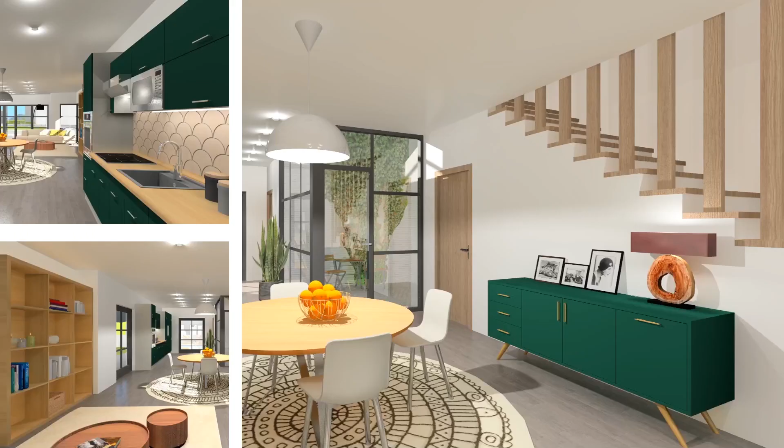Nice meeting you all, this is Zoltan Toth here. Together with Illes, we did quite a number of webinars in the past, and the topics we are always trying to focus on is to show what ARCHLINE is capable of.

There are two products that we are showcasing today. One is ARCHLINE.XP, which is a design software, and the other one is ARCHLINE.XP Live, which is the fully immersive architectural visualization software that you see on the screen.

Barbara mentioned in the beginning that there is no CAD skills required. ARCHLINE is a CAD software, but it's very forgiving for newcomers. So if there's one advantage I could mention right off the bat, it's that it has a very forgiving learning curve.

I think when it comes to interior design, the first thing that we have to start with is just imagine that you sit down with your clients and you start throwing around ideas, and the first thing you have to compile is a mood board. Now, what is actually a mood board? It would be a collection of ideas, inspiration, textures, images, or just things you are throwing out there in order to influence the rest of your workflow.

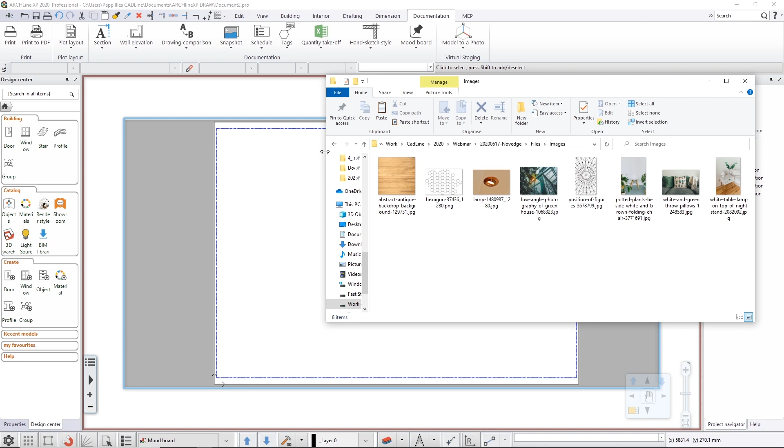So in ARCHLINE, you start with a sheet that you design, define how large of a sheet you want, and then you just start throwing in pictures. The point is that you don't need an external image manipulation software to do that, because ARCHLINE gives you the environment to build up these mood boards yourself. In addition to images, you'll be able to add even hatch patterns, colors, textures, text, or any kind of raster format.

You can use this to show your clients what the end result should be influenced by. Do you want to crop the images? Do you want to modify it? Maybe you want to recolor them. You can do that too. You can even invert the colors.

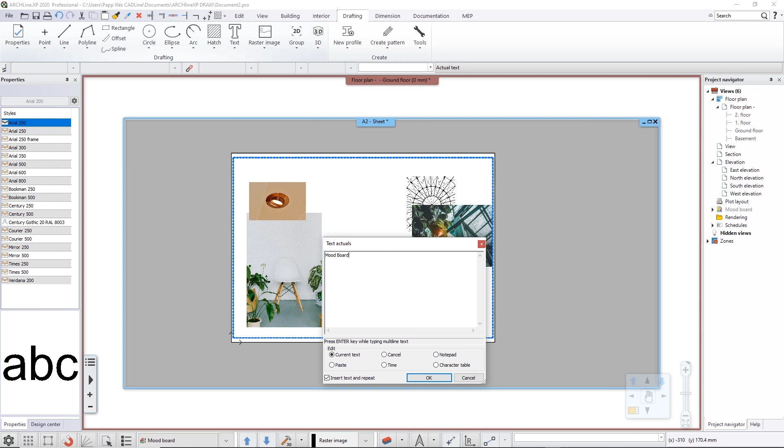The point is that this shouldn't be complicated. This shouldn't be a task which would require external software. Just use ARCHLINE.XP to get on with the first couple of steps of design. Like I said before, you can add text, even table text if you want. This will be the first part of your design, even before you get started.

Once you have a good idea about what kind of ideas you want to communicate, you get down to design. But more often than not, you are not going to draw the first lines because somebody else has already done that on your behalf. So more often than not, you would have to use external files from other sources. I'm thinking of images, PDFs, maybe CAD files.

One advantage I could mention in favor of ARCHLINE is that it is very open to other platforms and file formats. So it might happen that you get floor plans in a PDF file, raster image, maybe an AutoCAD file, or if you are working together with an architect, you get a file from Revit in an IFC or even SKP format. The point is that whichever file format you might be finding out there, you should be able to import and process them. We have a few examples here without showing you everything, because time is not enough for that.

Let's go with the first example, importing an image. Let's assume that the best you have is a scanned floor plan, a raster image, which is not the highest quality, but if that's the best you have, then that's the thing you have to work with. So the only thing you have to do is grab the file, drag it, and drop it onto the software. Do we even know how large this floor plan should be? We don't, so we just place it.

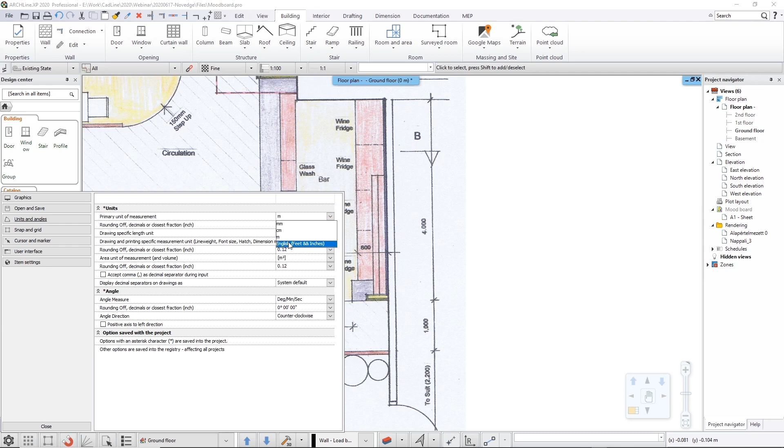If you find any numbers, now we know that this plan came from Europe and it has millimeters. But how it should be recalculated, that's anybody's guess. First, let's check the units that we have. We know the software is now in meters, in metric, but we are just going to quickly switch it to imperial and define the rounding, the decimals, etc. Once we have done that, we can rescale this image to fit our purposes.

Now we know that, for example, 4,000 millimeters should be 13 feet and 1 inch. So we are just going to recalculate that. Just type in the values, punch in the values, hit OK, and the software rescales the whole thing. The result is a fully scaled up floor plan you can start working with. You could be using it as an underlay for your further sketching. So this is not a CAD file, this is a raster image, as good as it gets, but this is a good start.

Now let's talk about PDFs, another very widespread format. When it comes to PDFs, you could be facing a similar raster-based PDF like this one, or you could be luckier than that and have a vectorized PDF, which happens more often than not. So let's punch this in and see what happens.

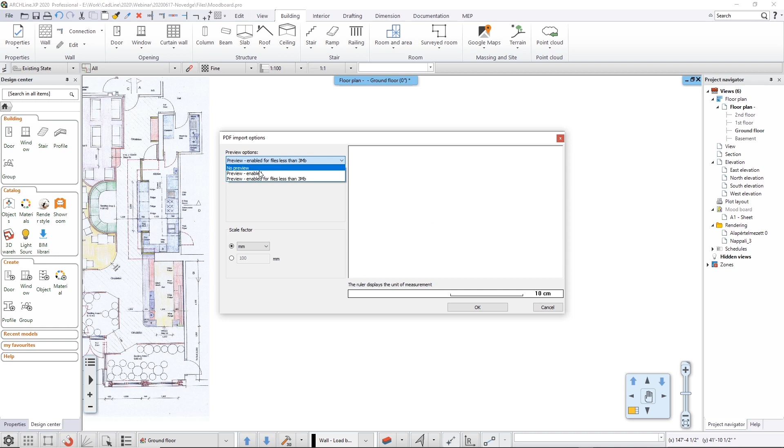When you have a vector-based PDF, you don't have to care about inaccuracies because the software is going to be right off the bat asking you about the scale of the drawing. If you don't know that, that's fine, you can fine-tune it later on. But this gives you a preview to show you, okay, if we import this as it is, that's the end result we would be getting. Obviously, this is not good.

So it would be 20 meters. How much would that be in feet and inches? We don't know, but we don't have to know, because once we zoom in, we see that there are actually imperial values written on this floor plan. So we could just simply measure distances and see if this checks out. Let's do a quick measurement: one click there, another one there, 16 feet. And I think, yeah, it's 16 feet. So this checks out. Now you could be using this PDF data to sketch your design.

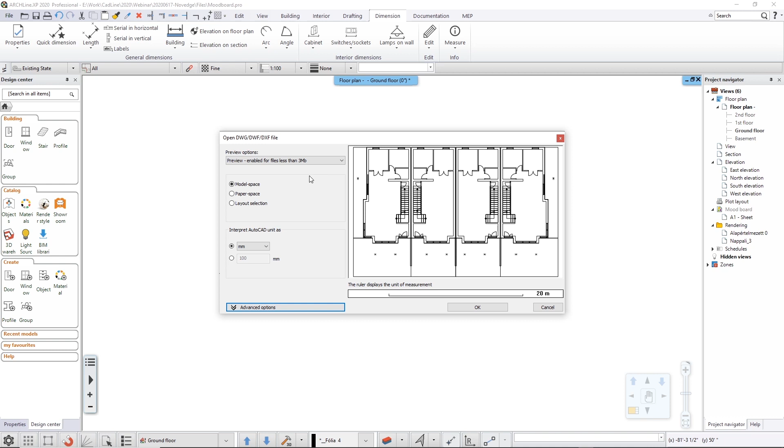There's a third scenario, when in addition to images and PDFs, you are working with a vector drawing, maybe a DWG or DXF drawing. And that's what we are doing now. Imagine this: you've got this drawing from an architect of yours who created this architectural drawing, but your task is now to recreate the drawing in 3D and furnish it. And that's what we do.

We just first import the drawing. Maybe we do a dimensioning on it to see if it makes sense. And after that, we have the task of turning this dumb two-dimensional drawing into something more lifelike.

All we have to do is click on the endpoints of the walls, click on the opposite side, and the software creates the three-dimensional wall based on the thickness. Do we have to care about the wall thickness? We don't. We just have to keep on clicking and the software would create the rest.

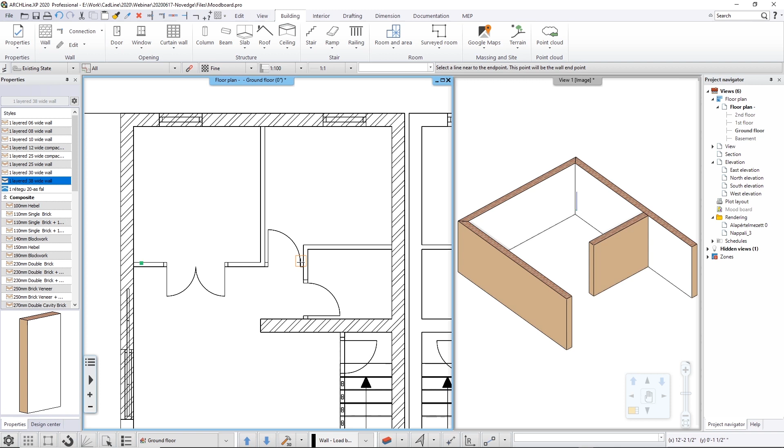One thing we have to figure out is once we have the partition walls, how do we get the openings, doors and windows into the software? Luckily, ARCHLINE comes with a library of doors and windows, which we can use to quickly recreate what you see in the line work.

We don't know the height of these doors and windows, but we don't have to. We just have to know the width, and the rest would be calculated. So you go with the door tool, once you have picked a suitable door from the door and window palette built into the software. This is a library built in, by the way.

You don't have to download this. Just click on whichever you want to use, and then you can just track over the drawing, and you end up with an accurate door.

Now, as I said in the beginning, you don't have to be a CAD pro in order to take advantage of ARCHLINE, but it is a CAD software, so you can use it to your advantage. What am I talking about? For example, when you have a DWG drawing imported, sometimes you use it for recreating the building, but at a certain point you don't need the drawing anymore.

So you want to know how to disable these things. Once it has copied the objects, now we can show you. Let's assume that we don't need this drawing anymore, so we just want to disable it, and this is where the layers come into picture.

If you ever worked with a CAD software, this should be nothing new to you. You can use layers in ARCHLINE. It is a layer-based software, so if you're coming from a CAD background, this should be nothing new. If you are new to layers, try to take full advantage of them, because they are just going to make things much, much easier.

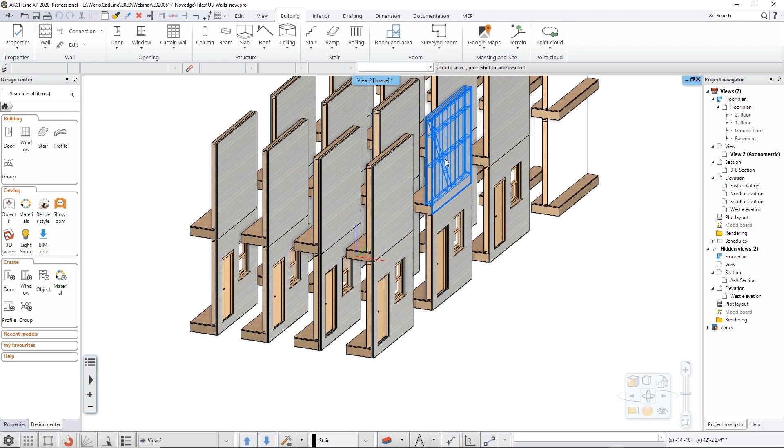We have an example project just to show you that if you have multi-layered slabs or multi-layered walls and stud work and veneer, etc., you can create that in ARCHLINE. I think we even have a project to show you a more complex building in this regard.

You can see that everything comes together in the software. We are not creating that, but it's important to know that you can create with ARCHLINE a structure like this one. Now, let's jump back into the software and see what happens once we have finished the first floor.

Because once we have the main walls figured out, the next logical step would be to actually have something to walk on, right? Because you don't want to fall through this building. So let's just load up another version of this project, which has all the walls figured out, and we are just going to proceed with that.

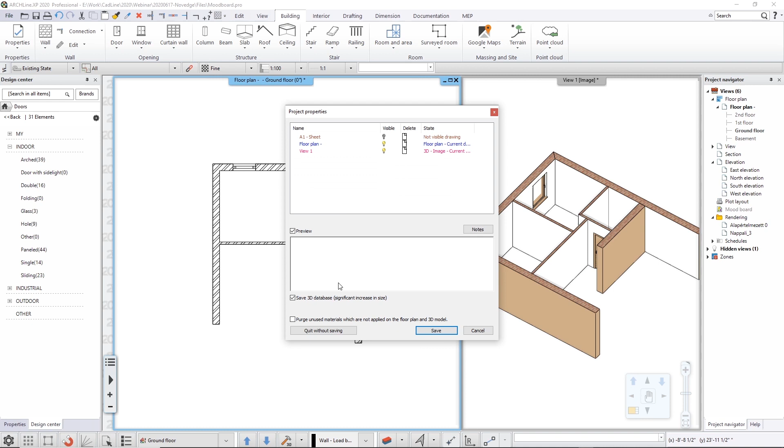The rest will just be rinse and repeat. So if you don't mind, we are just jumping ahead. Let's assume that we have all the walls and we have the openings. Next logical step would be the slab, which you can create automatically.

Just track over the whole drawing and tell the software to create it based on preset values, which, by the way, you can refine. But we don't care about this at the moment. What we care about is how to create the staircase.

Imagine this staircase came from a two-dimensional DWG drawing. You have the lines, but you don't really know anything else. So you can pick up the lines and tell the software to create this for you. You use a tool called Stair by Treads, and the software tracks the lines. You just disable everything you don't need, and clean up the drawing if needed. It's a matter of preference.

Once you've deleted the things you don't need, you have a couple of lines you can track with the tool. So Stair by Treads - the only thing you have to do is click on one of the contour lines, which signifies a tread, and tell it how high the thread should be, say 7 inches, then just keep on clicking. When you're done, the staircase is automatically created. No need for any other calculation.

The staircase is there. One thing to point out is that the stair can be in connection with the wall, so it's worth talking about how you can make the software automatically cut things you don't need. Again, you don't have to profile the wall yourself. You just tell the software: I don't need this wall above the staircase, just cut it, and it should be done.

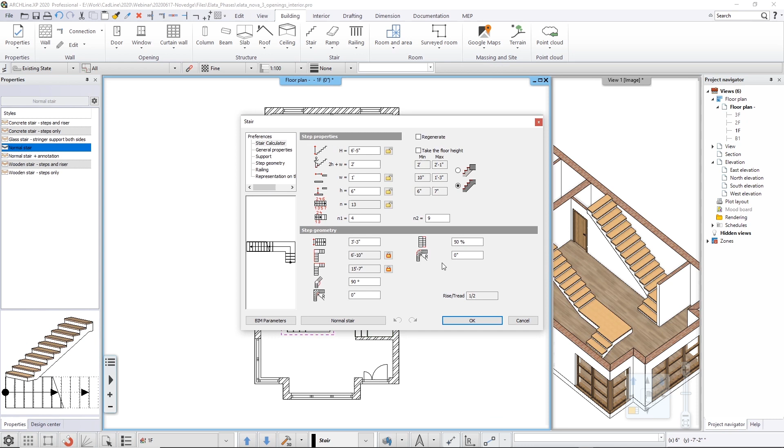Once we have the staircase defined to our taste, the next question is how do we get from one floor to the next? Since this is a two-story building, there are things we have to do on the second floor. We have a floor structure, and the only thing you have to care about is that you can duplicate elements to another floor, so the content gets copied. You don't have to recreate the whole thing - you just say this content should be moved or copied one floor up.

Once you've done that, you can clean up the drawing and make it neater - delete the staircase, the partition walls, anything you don't need. Quick question: what happens with the staircase? You can't use it because there's no hole in the slab. Again, an automated tool jumps in to help: click on the staircase, say cut the slab above the staircase, and there you go.

And another thing - the roof. You don't always need to make a roof in an interior design plan, but if you're doing a loft conversion, for example, you need to get the roof pitches right. For that, we're going to create a very simple roof above this drawing, which is another stage of this project.

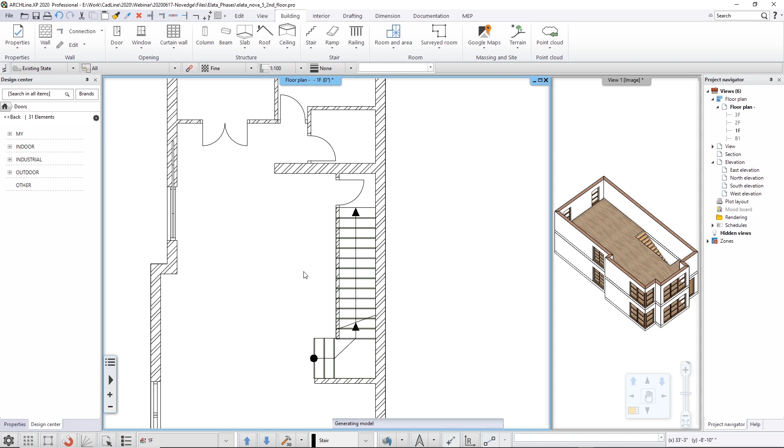Without going into details, ARCHLINE comes with a very complex roof editor. Every single pitch can be customized with battens, rafters, collar beams, and more. You can go that path if you want a visible roof structure, but if you're just going for a very simple conceptual roof, you can do it just like that - drag the outline, hit enter, and the software does the rest. The only thing you have to care about is the pitch, the roof size, or maybe the texture.

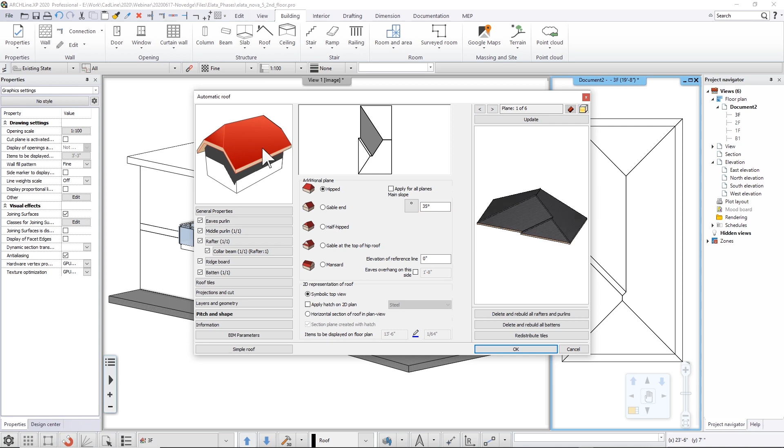Just click on and pick a texture that you need, then go to pitch and shape, and you can change the angles to 25 degrees, 35 degrees, or whichever you want. Illés just created a firewall, turned one of the roof panels into a gable end, and with very simple clicks you can distort the shape any way you want. How high the roof is from the walls can be defined with certain values - just type in the value you need, hit OK, and you end up with a roof like that.

But this is all external architecture. Now, once we have the building, we have to talk about what happens on the inside - how do we get it properly designed? There's a couple of things we have to do.

We have to add furniture pieces, create tiling, use textures on the walls, so lots to do. So we are just going to jump in, and for example, when you have a clean environment like that one, you want to populate it.

Just a quick word about how to set a perspective. Previously, by default, the software works in a sort of axonometric view, which you can actually switch. You can set up a side view, left view, and so on.

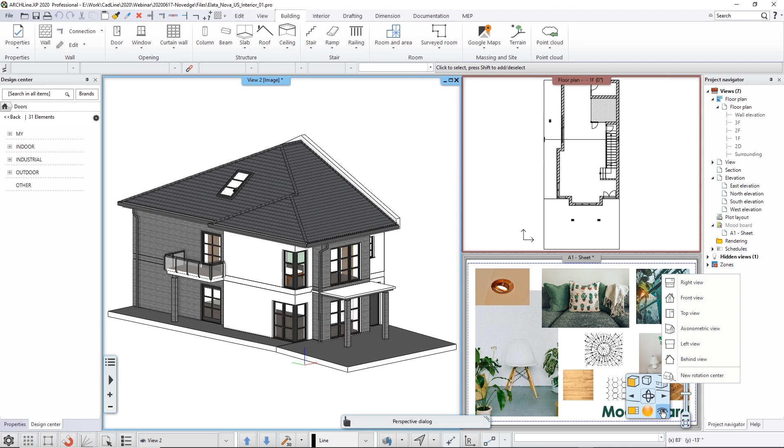But also here, on what we call the navibar, this navigation panel, you have this little eye where you can actually set up where you are and where you look at, and define a nice perspective for yourself, then save all these views. Sorry, this is what I wanted to add.

What I love about this is that you don't have to punch in coordinates. You can do that, but it's very visual. You can just grab the camera and move it wherever you want. Now, the couple of things you want to do here: first of all, let's populate the room with furniture.

When it comes to furniture, there are two major depositories where it could be coming from. One is the built-in library we have, a wealth of objects in the software - lamps, sofas, tables, etc. That's a no-brainer. Once you have placed these elements, you can rotate them, move them, scale them, resize them.

However, the market changes so rapidly that we can't keep up - nobody can. So we connect to the largest object libraries, one being the 3D Warehouse from Trimble, where you can find basically anything. If somebody has ever designed these elements, they should be up there. So if you want a sofa, coffee table, etc., you can just type in the name and download it.

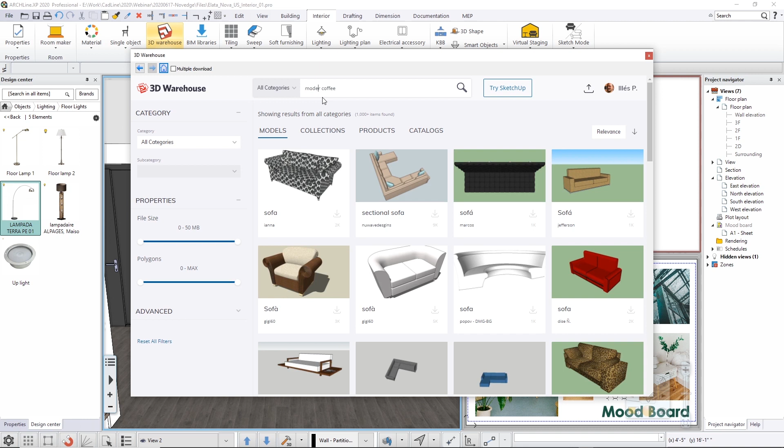Now the important thing is that ARCHLINE connects to this library directly, so you don't have to manually download things, filter them, import them, and then deal with the result. Instead it's integrated into the software, so you can tell it you're looking for a coffee table within a certain size range, and preview the elements before you download them.

Once you do download them, they jump into the software and are treated as a local element, so now they're part of your library and next time you can use them just fine. Same applies to any kind of elements - you can download anything you want.

Now, once we have a couple of furnitures, one thing I have to point out - we mentioned the 3D Warehouse, but if you have an SKP file, an IFC file, or an OBJ file for an object, you can use that too. So if you have 3D libraries, check the file format - more likely than not, we can import it as well.

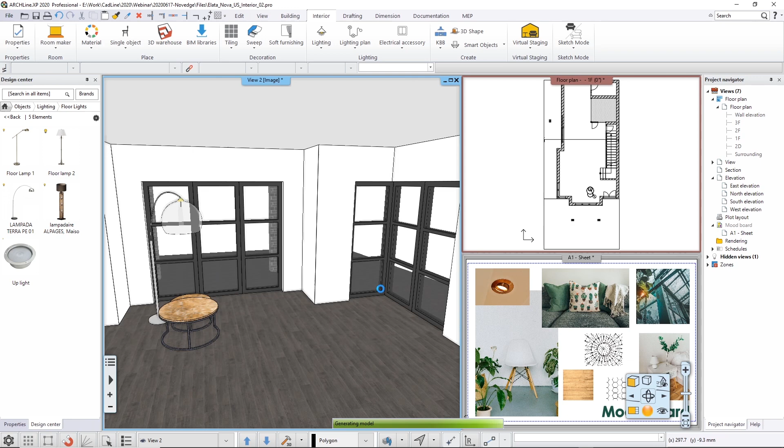Next topic: when it comes to interior design, the thing that is very difficult to handle is tiling. Why is that? Because when you want to create tiling, you have two choices. You could use a texture, but that doesn't really give you estimates, or you can use other tools to simulate the tiles as 3D bodies, but that's sometimes time consuming and takes a lot of processing power.

Now, in our software, you can tile with actual 3D bodies. There are two advantages: one, it looks very good on a render; the other is that you get exact calculations out of it. So if you want to know how many tiles you have on, say, 20 square feet of surface, the software can tell you.

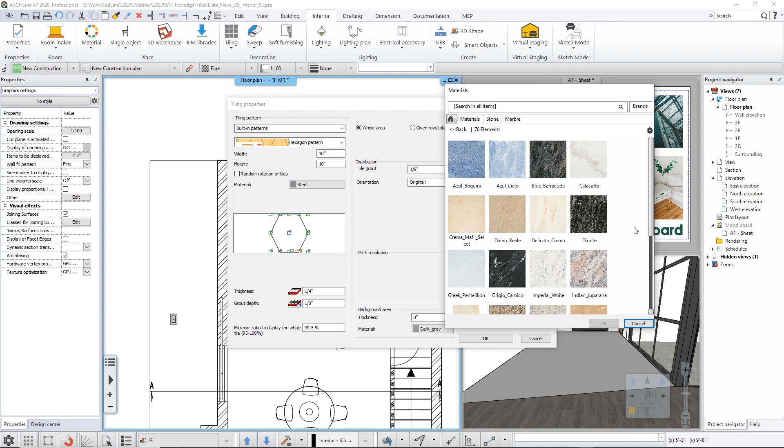You define what kind of texture you want to use, the size of the tile, the layout - how you want them organized - and just hit OK, and the tile is created once you've defined the direction. You can even move these things, randomize the tiles, and the software creates them based on your preferences. If you don't like it, you can shift the tiles, change a few, or change the area being tiled.

So if you want to change the layout, you can do that too. One thing I wanted to add is that you can actually reshape this layout. You're not fully following this contour, but the contour you are designing is the so-called background area. When you edit that area and hit enter, the software will reshape it. You can actually follow this contour fully with the add and edit tool, so you don't have to have just a straight cut at the beginning.

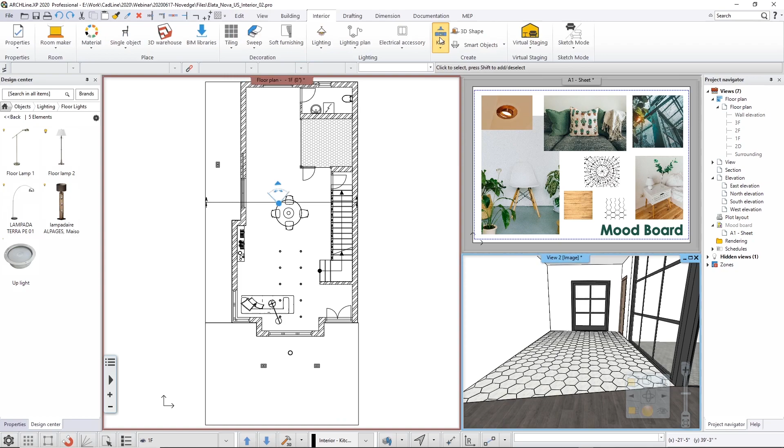Can you just zoom in on the 3D to show that we are actually talking about three-dimensional bodies with grout and distance between the tiles? It looks very good on a render, especially if you have the textures and materials figured out. Which reminds me, the next thing we have to talk about is materials.

Archline, just like with objects and furniture, comes with many textures you can use. But sometimes that's just not enough. Sometimes you want to use the texture you see on screen, but give it a different tone, and you're able to do that. Once you have a material set up, you can add a color, mix another color into the texture, and say you want a brownish version of the texture. Don't forget this does not replace the original, so it's a non-destructive way of trying alternatives.

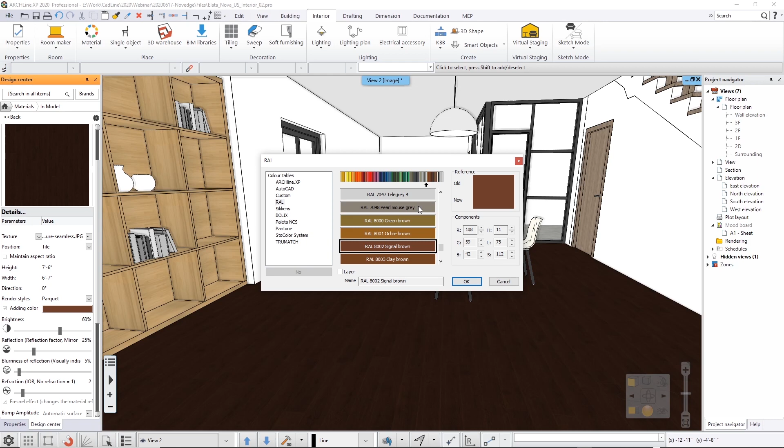Imagine you sit down with your client and the client says, I love the texture of this wood, but I want a different color. Then you can just show alternatives like that, simply enabling or disabling the coloring.

Another scenario: your client has a very specific wallpaper in mind, something they just want to see on the wall. But the problem is you can't find the right digital representation, you don't find a seamless texture for that. What happens then? You could use an external image manipulator software to fix it, but first let's look at the problem itself.

Imagine this was the picture your client sent, saying this is what I want to see on the wall. The problem is that this is not repetitive, so if you put this on the wall as a repeating pattern, you'd see that the pattern is broken. So you have to fix this somehow.

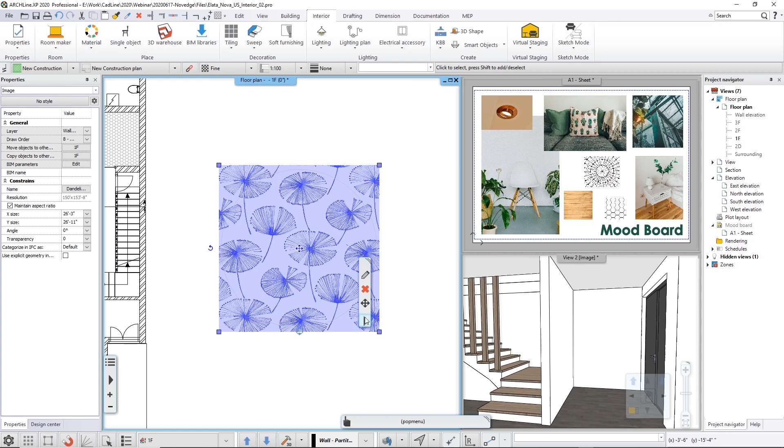Luckily, there's a tool in the software which creates a seamless pattern from any kind of image. You can just click on the image and try to crop it, and the software will extend the image and tell you that if you crop it like this, the repetition would be fine.

Once you've done that, you can save this into your material library and use it on any kind of surface, which is what we're doing now. This way you don't have to reach out for another software, you can just use whichever you want.

The height and width should be, I think, 4 by 4 feet would be fine. I think you have inches, yeah, sorry, I'll fix that. If you created a material and made a mistake, just as I did, you can find it in the material libraries and search for it. I used the name Novedge, so it will be easy to find. I have this here, and when I click on it, I can see the values, and I see I made a mistake, I used some very small value, so I just fixed that.

I can even turn on the option to maintain the aspect ratio if I want. Now I've fixed that, so it's in my library at this size, and I can also change how it reflects light and so on, and what sort of material type this has, like for example if it's actually a wall surface or something like that.

In a very simple, intuitive way, I just click and drag and release it on the surface, and say I'd like to use this as a painting, which in the software means the same as wallpaper. Now when I apply it on the wall surface, it's quite large as I want it, and it's nice and seamless, just as I want it. So I didn't have the perfect seamless image at the beginning, but I could solve it within the software.

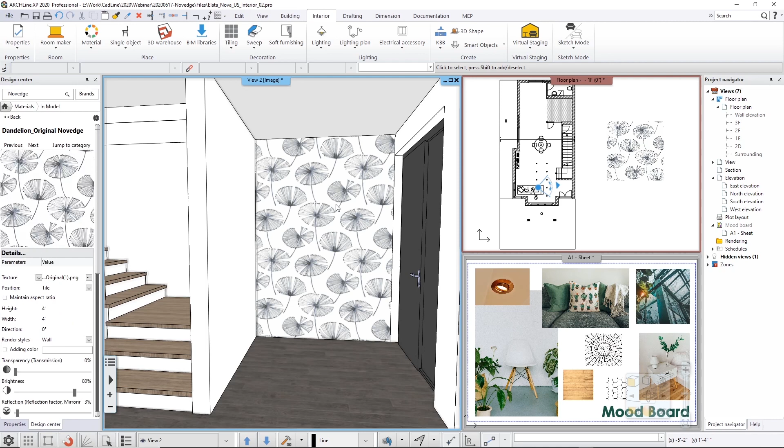So can we just quickly recolor this? Yeah, you do the same thing: select the material, right click on it - this is what we call a context menu. Click on that, find material, and on the left hand side use the add color option. You just try to find something nice - let's go a little bit darker gray tone or something like that, and it recolors it. This works exactly the same way as it did with the floor.

So there's no difference. This texture can also be made transparent. So if you'd like, you can also create a nice lampshade out of it, or a curtain or something like that. Perfect - it would look great on renders.

Now let's go to that corner which is tile, because the next task we have to complete is creating a very conceptual kitchen. When you're doing kitchen design, you could be reaching out to the 3D warehouse to find furniture pieces, or you can use the cabinet maker in ARCHLINE.

Now the cabinet maker is a tool to create parametric furniture, but what does parametric even mean? It means you can resize elements without squeezing them. You can open the doors for these cabinet items. You can add appliances to it. So you can use all kinds of elements here with all kinds of textures, and they would behave as kitchen pieces.

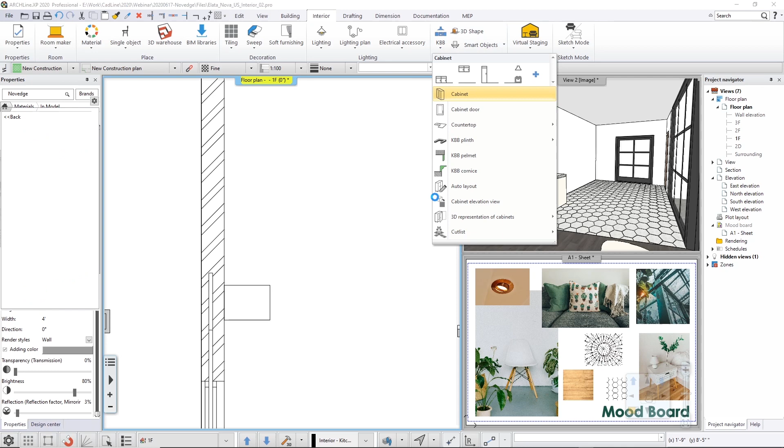So if you need to have quantity takeoffs on these panels, they are not going to behave as dumb, information-less objects. Instead, they will behave as intelligent objects from which you can get calculations.

Now, once we have the basic elements for this kitchen figured out, the next thing we could deal with is how to document it. But before we do that, let's allow Illesh some more time to finish the kitchen, maybe put in a worktop or things like that.

What I'm willing to do now is quickly assemble one basic layout, because you can actually fully design a kitchen cabinet in the software, which is fully parametric. You can change any option that you can see, and any size and any sort of inlay of these items.

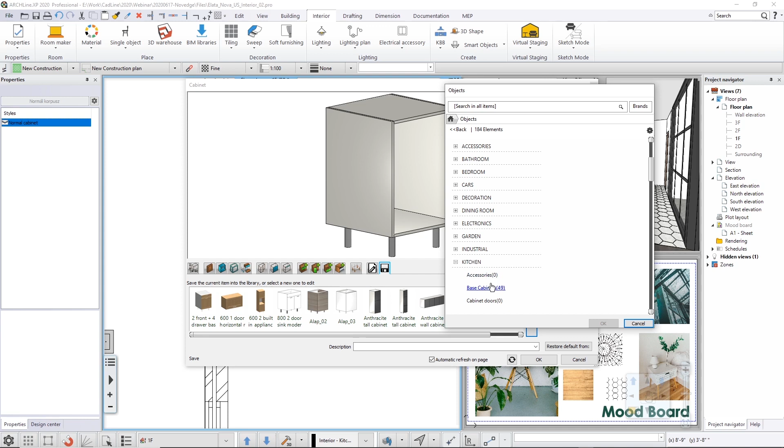The software comes with a built-in library of, for example, kitchen units. You can find base cabinets, countertops, cooktops, high cabinets, and so on. If I just select the high cabinet, like this one, and use the other one - I select one, hit OK, and say okay, let's go with this one. I would like to see one here, another one here, and a few more here, and so on.

So I just keep going and keep adding those things. What I usually do, I don't always start from scratch - I try to find units that are similar to the ones I would like to use, perhaps in size, perhaps in layout, and then I start customizing them.

And by the way, this is the exact same way I would recreate an item. So for example, if this is a unit here, a very important thing of a unit is on this page - the unit has divisions. So you can say you have this unit divided into 1 and 2 parts. And then, for example, in front of this part, you would like to add a door, or insert a drawer or something like that.

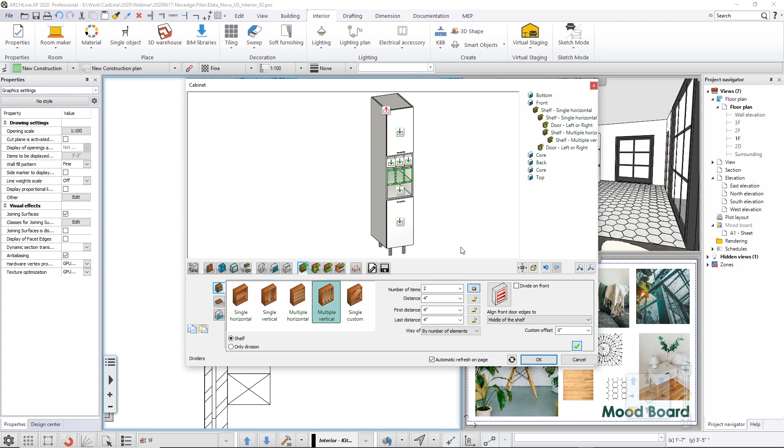So if I go here and say I don't want to see a door, I just erase that - then I have an empty space here, which I can even change the size of, and I can keep adding further divisions. So I can say, okay, here I would like to add, like, 2 more shelves, and I also would like to add 2 vertical divisions, for example. I'm sorry, I just changed this one. So I go here, click into this one, and further divide this into additional units, and you can just keep going and adding those things.

And the way this layout looks, you can always find how these are divided into several parts. If you change where this division is, which I'm doing now, I just keep moving this bar, and I can type a value to determine the top unit part and the bottom unit part, and I could do the same with the bottom part as well. So this way you can redesign the unit, add items, and completely reshape it.

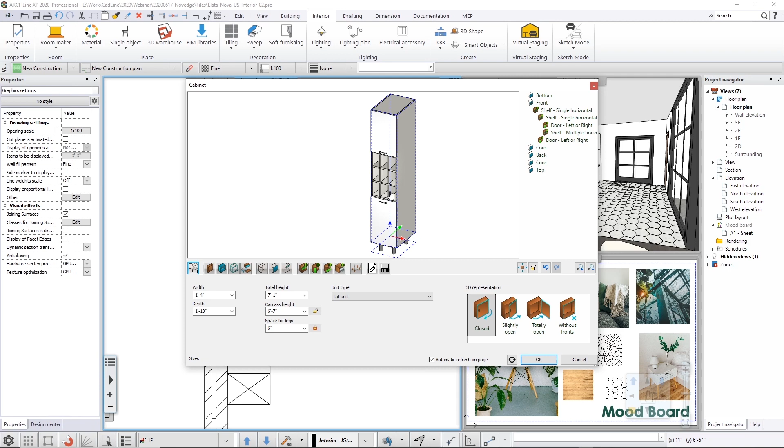The first page is about the width, height, size. You can also change the topology of this furniture. You can also add doors to the other sides, and so on. So this is how it goes.

Just as a final touch, before I load up the final version of this kitchen, I'd like to show you how to create a countertop, which is this tool here. You can quickly set up a so-called path, and you can say, well, now this is a straight path with the default materials.

Now perhaps I would like to add something like an electric hob or something like that. When I do that and I hit create, then I can just remove it. Unfortunately, I placed it in the wrong place, but I can say I would like to place it, like, 2 feet from the left-hand side.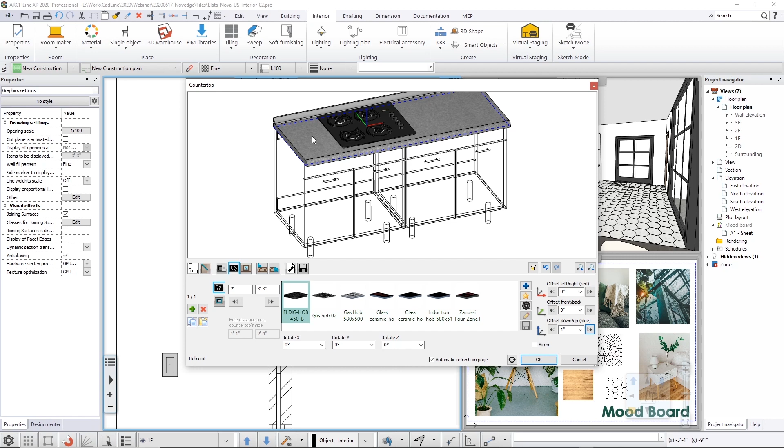I would like to change how it's positioned. There are always these fine tweak options where these tiny arrows help you understand how it is sunken into the countertop, or whether it is moved to the back, right, or left-hand side, and you can just nicely move it to the place you want.

And then the same thing you can do with the wash sink and so on. Let me just load the final version so you can see how it really looks in the end. And of course, you can also customize the material of it.

The point here is that with just a few clicks and very little effort, you can create a conceptual kitchen design from which you can move on. So if you want to communicate your ideas in terms of what kind of panels you want for the kitchen, or maybe you want a kitchen island or not, that would be the time and place to do that.

That actually gives us another topic, connected to the kitchen elements - what happens with the electrical things. If you look just above the kitchen, you see that we have spot lamps.

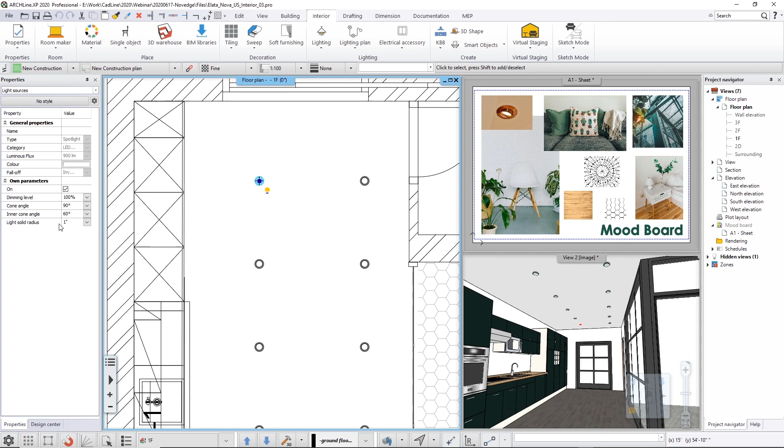Now, with ARCHLINE, you are able to create lighting elements. You are able to handle lamps, which, if we see it later in rendered images, are going to act as light sources. So they are going to light up the scene. We have 10 little spot lamps here, and they are going to make wonders for the render, because you can define the light's color and intensity.

But what happens with the documentation part of things? So how do you turn these into - or do you want to first show how to create them?

I'd like to show you a quick distribution, because this is really easy in the software. What you need to set up is just an object that you can find which has lights. This is in the same exact library where I was previously, in objects lighting, and there you can find ceiling lights, spotlights, and so on. So this is where you should look for these items.

Now here, what I've placed earlier, I just determined the ceiling height - this is the base elevation. And then you can just create a copy. You can say you would like to move a copy of this. Then you can select these two, and say, well, okay, I'd like to multiply it, and I'd like to have - I don't remember the exact number, but perhaps I'd like to create 5 more. Yeah, 5 more, that will be fine.

And then let's just distribute it. So this is how easily you can change this distribution.

And then now coming back to this part which you have started. Please keep explaining and I will add these things. Well, the point here is that you not only want to have things which look like the real electrical items, you want to handle them as electrical items. Now what does that mean?

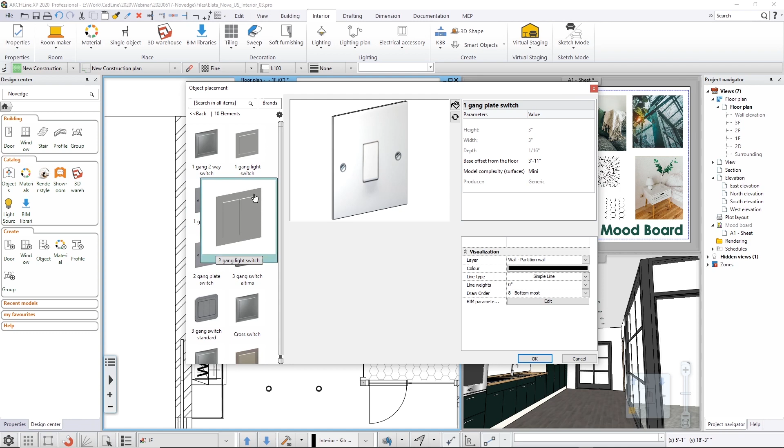It means that you can get documentation out of it, and one piece of documentation for this would be an electrical plan. Now what Illesh is doing now, he's placing European style switches, so the 2D representation is what we use here in Europe. But if you have a different standard in the US, you can change that to another library element.

Now the point here is that you want to organize the switches with the lamps, but you don't really want to do all this manually. So you want to get a living connection between the switches and the lamps. All you have to do is click on the switch and organize it like that. So if you keep on clicking the light elements, the lamps, then they would be organized with the switch.

Now once you have done that, you want to track in the plan what elements I haven't connected, and what elements I have connected already. Undo and redo works in every single software. I just wanted to undo this so that you can talk about it, which I intentionally forgot.

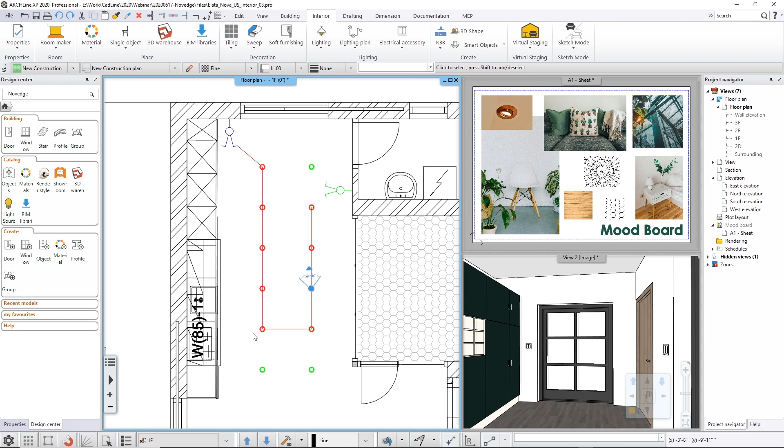So you can track in the software the status of the elements. If you display the statuses, you see things which are blue, green, and red, showing the different levels of connection between elements. If something is not connected to anything, it's green. If connected to only one element, it's blue, and if it's red, it's fully connected. The point here is that the software tells you if there's anything you have forgotten. So from now on, the software will be holding your hand while you are doing the electrical plan.

Now what Illesh is about to show you is something we call the room built-in power, and for that we need a room and area stamp. So let's just do that.

In this version of the project, we are about to create the documentation, and we will also create a whole elevation view. But to show you the tool Zoltan was talking about, I will quickly place a room by walls command, using that to place a living room. This is what we call a room and area tool. I just click inside the room, and the software automatically measures the full layout of this whole room. You can, if you want, also divide it into kitchen, living room, entrance, and so on.

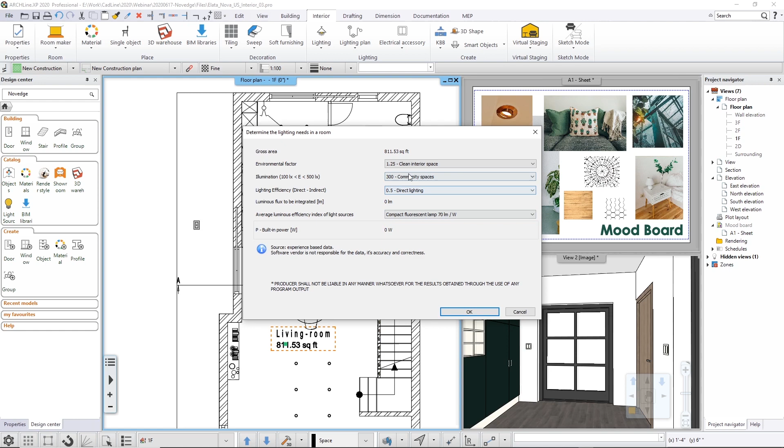Now I'm able to use this interior lighting plan, room built-in power wizard, which isn't calculating the exact value, but gives you an overall estimation based on environmental factors like illumination type, lighting efficiency, and so on that you could find here. You can say that, for example, if you have any of those values set up here, the software will calculate the proper value that should be used if everything is generalized.

Now in case of an apartment or a living room, you don't only have the same exact type of light sources, so this won't calculate the exact power. It will just give you a nice estimation about that. Now let me just load this back.

Before we move further into documentation, I think this would be the time when we do renderings, because at this stage of the project, this is when you do the first visuals. ARCHLINE.XP comes with its own rendering engine, which is built in. It's not something you have to purchase as an extra, it's part of the software. Based on the perspectives you have already created, and based on material and light settings, you can get the software to render the visuals.

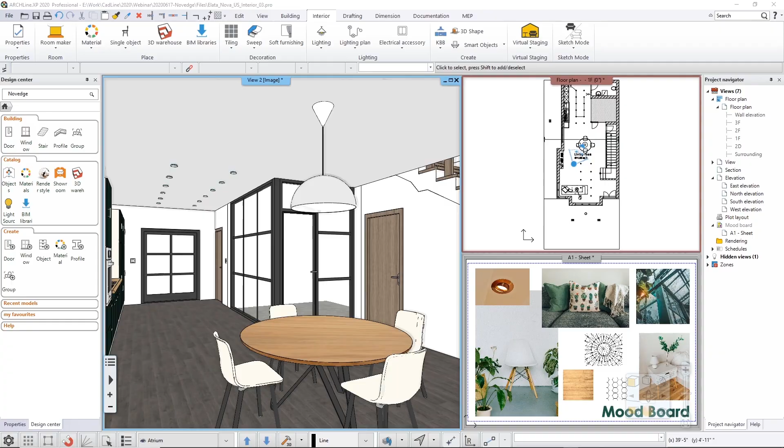And the end result, maybe we can show a few images in terms of what you can expect. So that will be the end result you can get from the software. Very nice soft lights, high quality texture. This is the photorealistic render that the software has.

In addition to this, if Illesh could open up the chart with the file exports and imports, we could talk about that too. So if you already have a rendering engine that you like, Artlantis for example, or Thea, or any other solution, it's very likely that you are able to connect to that.

ARCHLINE has many export formats which other software products can read. Be sure to check the exports and imports of the software you're using, because maybe you already have something ARCHLINE is able to connect to. If you don't have an external rendering engine, that's fine too, because ARCHLINE has you covered in that regard as well.

Let's jump right into documentation, because eventually, from the mood board all the way to documentation, this is what's going to pay your bills, right? This is what you have to submit at the end. So you need to know how to document things and what you can actually do.

Let's start with the wall elevation. I think the kitchen would be a good place to start as any. You have two choices to get wall elevation: a vector-based and an image-based one. We are going to use the vector-based one.

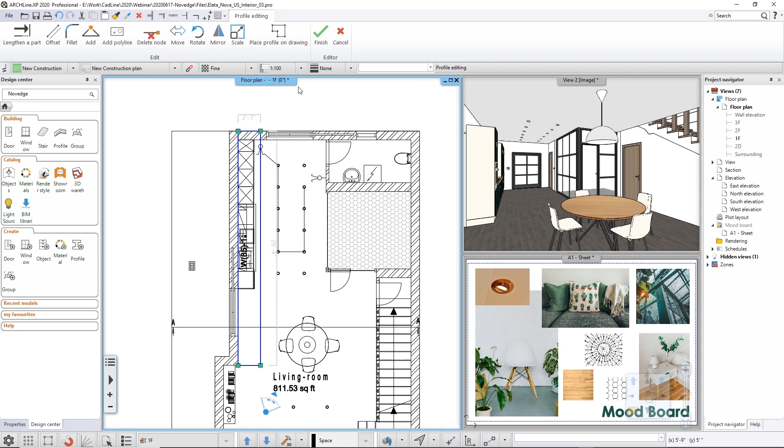Now you define what you want to see and how deep you want to look into your model, and based on that there's going to be line work that you can just grab from your design. The interesting thing is that these views are in connection with your model, so if anything changes in your model, you can update the views.

But if you don't need to update them anymore and you want to modify it, you can just explode it and rename the text, change the hatch patterns, maybe use color fills. From now on, this is going to be a line drawing you can use for any kind of purposes.

For example, you can dimension it up, you can measure things in it, because this is still in one-to-one scale. So if you want to measure and dimension the fixture heights or the fixing heights of the cabinets, you can do that. You can just click on the elements and the height values will be added.

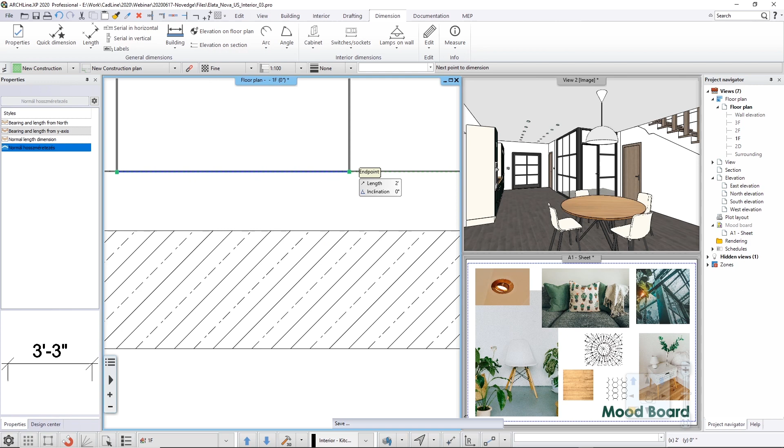Do you want to measure or make dimensions horizontally? You can do that too. Just click on the nodes and the software does the rest. If you're coming from a CAD background, this should be nothing new, but if you're not familiar with this workflow, it's very graphic, so you can just click on the things you want to dimension and the software does it for you.

Now, creating rooms within your design, we already covered that, but what happens if you want a dimensioned floor plan out of this? Because this is still a one-to-one model, how do you get this into a dimensioned environment?

All you have to do is define what you want to measure and how, so in what order. For example, you want to have the doors and windows, the overall external building dimensions, and the wall endpoints - that would be the list of criteria you want to dimension. Select the whole drawing, hit enter, and the software does the rest, giving you dimensional lines.

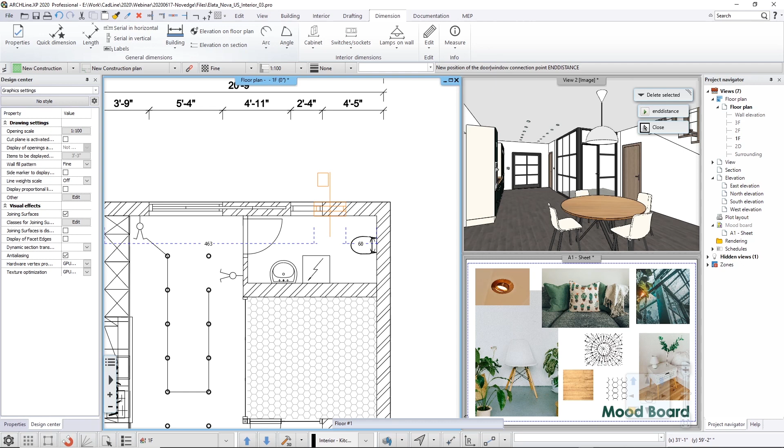And the funny thing is that if you change anything in your design, maybe the window just moved for whatever reason, the dimension would update with the element. So everything is in moving connection with each other.

Now, text we already covered, and annotations as well, but what happens if you want to get some kind of calculated values out of this model? For example, you want a calculation of the doors and windows you have. So how do we do that?

We have these things we call schedules, and this could be used to designate any kind of element in your design. If you use it for doors, the software gives you a list of doors in your design, but this is not just an offline copy list - this is a table text which is in connection with your model. So if you want to track back which particular window or door you see there, the software tells you with an arrow that this is it.

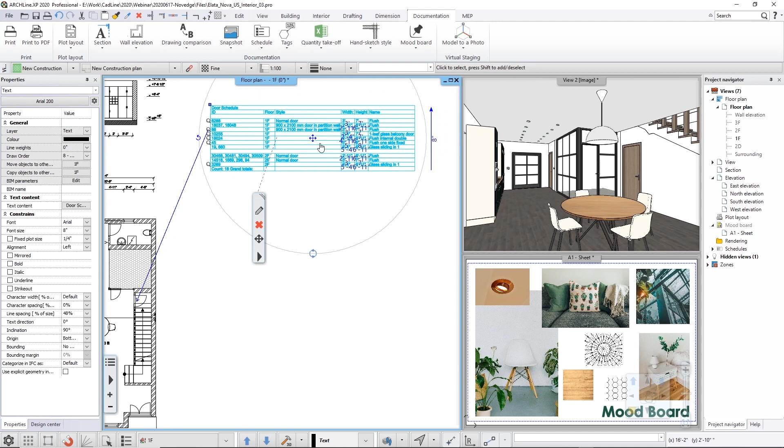Furthermore, if you go back and change the dimension, the model would update and so would the schedule. So this is a bi-directional exchange of information. The point here is that the design process is complicated and long, so if something happens and you have to rewrite things and update your design, you don't have to manually track the changes in your exports because the software does that for you.

Now, once you have the floor plan, the tags, the schedules, the dimensions, you want to gather all this up and publish it onto a layout. You can do that with the plot layout tool that we have. All you have to do is define the paper size, decide if you want to have a plot stamp or not.

We just use one and fill it out as well. Then you just drag and drop the content onto your drawing, and that way you are going to scale it down, because up until this point we worked in one-to-one, but now we are scaling down in favor of a much cleaner publishing opportunity.

So we are just going to define how large the excerpt from the model should be, and then keep on dragging and dropping the elements. The reason I'm doing this is because here everything is in one-to-one. Here I placed it at 1:100, but actually this kitchen wall elevation I would like to place at 1:50.

So I don't want to place it just the same as here, but I would like to use another tool, a very powerful one, that lets you copy parts of this original content to the plot layout. So you can tell this is something I'm willing to copy, and then I use this paste to plot layout tool. This is not the control copy-paste option, but the paste to plot layout tool. So I use 1:50, and nicely place it here.

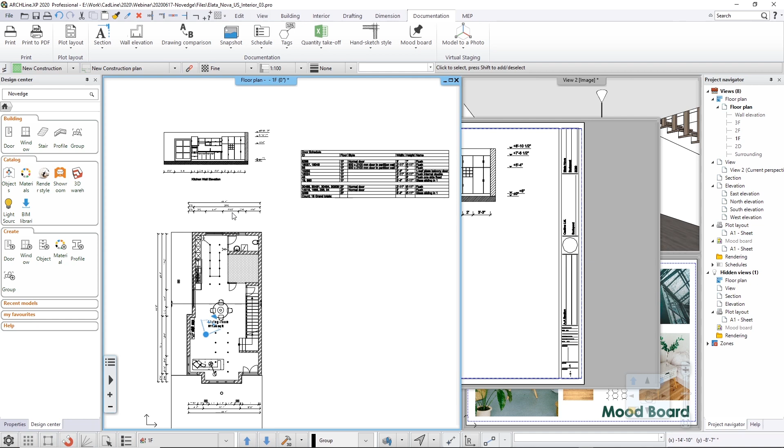Everything I placed here is in direct connection with the original drawing. So should I leave the office for a week and then pick up the work again and change anything, all I need to do is click here and refresh this.

An additional thing is that you can place anything on this plot layout that you can import into the software. So for example, you already created the rendered images, as we discussed, then you save them on your hard drive. Let me just quickly find those.

Then all you can do is bring these up, and this is what I'll do. I quickly click and drag, place this here, click another one, perhaps one of the quick ones. Just like with the mood board in the beginning, you punch in the elements you want to see on a layout, and you end up with a complete documentation in a scaled down version.

So up until this point, we worked in 1-to-1. That sums up what ARCHLINE.XP does, but now we talk about something even more exciting, because we are going to move towards bathroom design. And for the fun of it, we are doing bathroom design in ARCHLINE.XP Live, which is the visualization software.

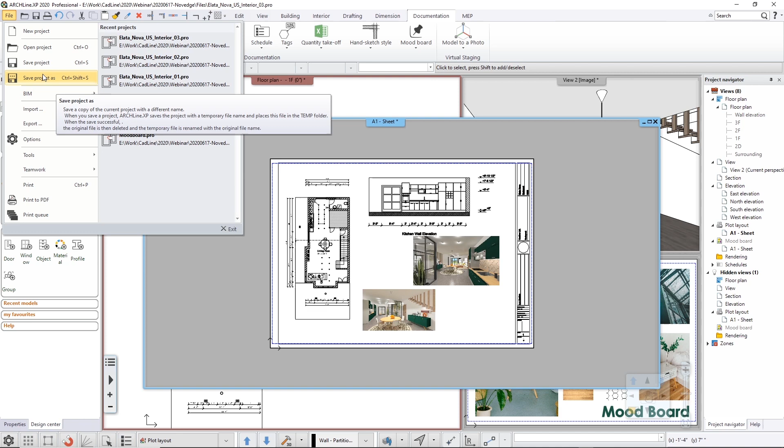Yes, just a second. Let me quickly load up the final version before that, so you can see this design in its full glory. That is the final version, this one, where we actually have everything collected into plot layouts, the mood board is also there, and the final renders are all done, and we also created all the calculations that we wanted.

So this is what we have created, and the cool thing is you don't have separate drawing files. Everything is in one single project file, and it's easy to maintain, easy to archive, and easy to publish into PDF files.

Now those things, images on the mood board, those are obviously photographs that I've... well, this is something you can do on spot. But now I used Pexels and Pixabay to find some inspiration for myself there. So you are free to use anything you wanted to use for your design, either initially or at the end of the final stage.

Now, moving on to bathroom design, this is the part when we want to get a little bit more creative with the tools that we have, and we decided to use ARCHLINE.XP Live, which is a visualization software with a very heavy emphasis on movement and on simulated effects.

Here's a video just to show you what ARCHLINE.XP Live actually is, because it's easier to show it than to explain it. The point here is that it's all about movement, it's all about nature, it's all about bringing in better lights, even more lifelike textures, and tweaking the effect. So imagine this, you have one result of your visual, but you want to fine tune it.

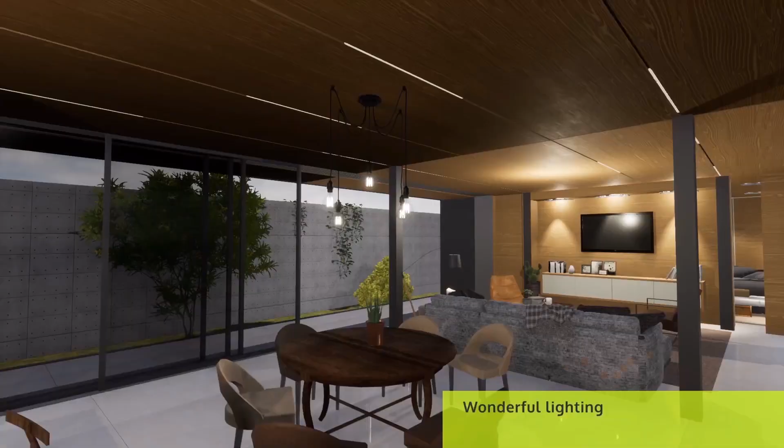Now, you could be doing this in an external image manipulation software, or you could be doing it while you are designing. If you do it while designing, you can react to changes better and test alternatives. The live software we are talking about can be used for many other purposes. Apart from bathroom design, it can be used for creating larger buildings, maybe a city block, or just tiny apartments. As long as the project justifies movement and the presence of large, many surface items, this could be a good tool to use.

Because what you can see on the screen is that people are walking on the street, leaves are moving on the trees. You can see high quality textures with some maybe wet surfaces as well. So this just really brings visuals to life, and like you see on the screen, things happen instantly.

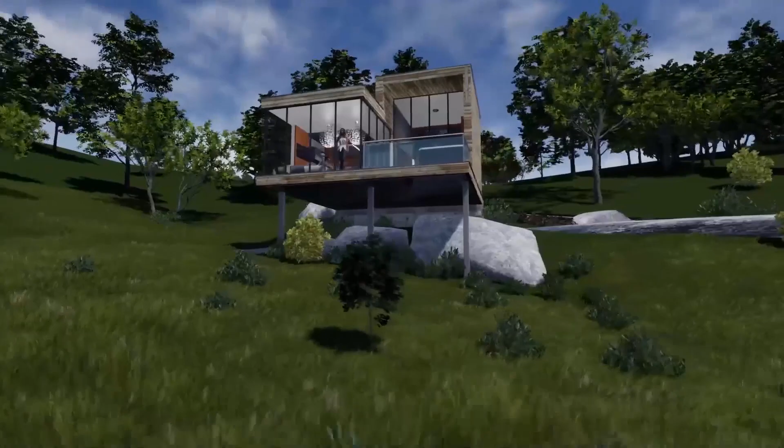So imagine sitting down with your client and asking how they like the design, and they say there's just a tiny thing I want to tweak, and you can do that right away. You don't have to wait for a renderer to finish its job.

The result will be visible right away, instantly, with a click of a button. Talking about bathrooms, you can do wonders with some candle lights, water simulation, maybe some better lighting, a few softer textures that just make things much easier. We have effects as well, so candle and campfire, or maybe a fireplace, just makes things easier to understand and easier to communicate.

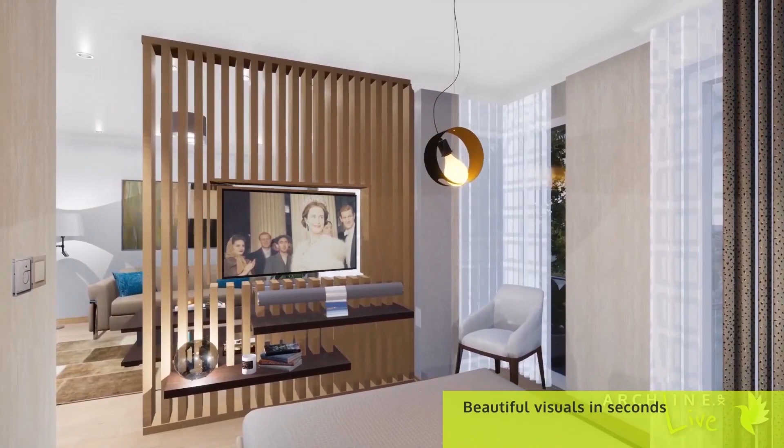So does the daylight cycle. If you want to show your design how it looks during the evening, you can do that just fine, and again, no need to wait for a rendering engine to finish its job. You can just show it right away on the screen.

Now, I understand that these things we are showing you here are actually user-made content. This is not something that we made. This is something that was made by the growing number of ARCHLINE.XP Live users.

Okay, so actually what we will create with this visualizer software, with the ARCHLINE tool, with ARCHLINE.XP Live, is that we will use this project. This is one particular project of a bathroom where we actually created everything the same way. We created the tiling, we downloaded objects from Google 3D Warehouse, and also found a few nice textures, created all the tiling, even the lights and lamps on the ceiling.

And here we actually used one extra tool which we didn't show you before, and that was the ceiling tool. We have a nice ceiling tool to create those nice suspended ceilings and decorative ceilings as well. But other than that, everything happened the same way we created the documentation and so on.

So now, to focus on what you need to do to be able to create lightning fast renders with the live visualizing software, all you need to do is, as I mentioned before, tell the software that, for example, one certain surface is a ceiling, one certain surface is some sort of ceramic, and another one is water, and another one is wallpaper, wall surface, and so on.

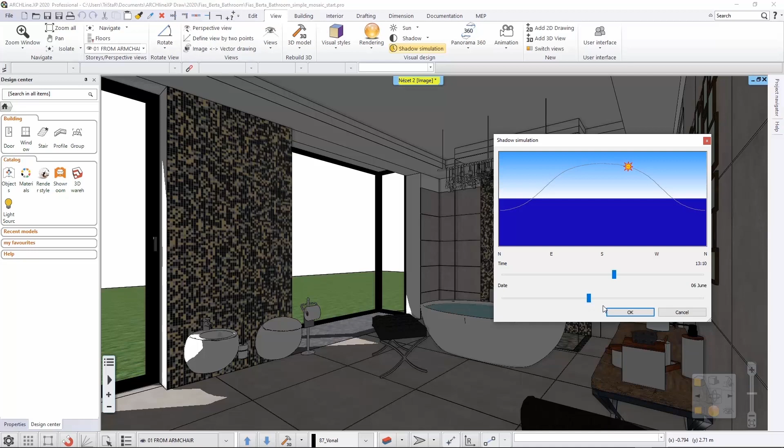You can actually do shadow simulations. So based on the geolocation, you can set up the geolocation, for example, on Google Earth with the software, and then using this shadow simulation, you can set up the proper daytime and nighttime, and find the best time of day when you would like to create the visuals. Later on, of course, you can change this, but it is a very powerful and useful tool to represent how it will look during daytime. And of course, you will be able to create nice nighttime renders as well.

Talking about that, we actually have a few lamps, similar spot lamps that we had before in the previous project, and also nice pendant lamps behind us with the long chandelier-like object. These are actually all real light sources, meaning they have luminous efficiency. They actually emit light, even though we can't see it now because we haven't created the visuals yet. But you can define that, and if you're familiar with it, you can also use IES standard light sources from manufacturers.

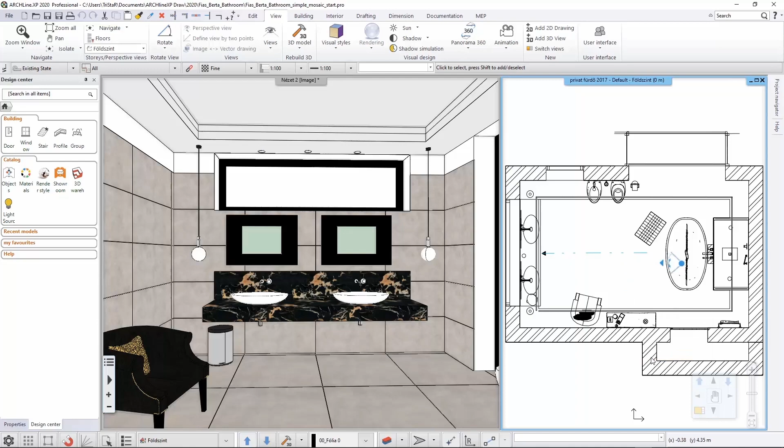There's one extra thing I wanted to show you, and that is the animation feature, which is very powerful. You can simply design a path and tell the software how you would like to move along that path, and how long the animation should take. You can create as many animations as you like, and at the end you can stitch them together into one single video file, right from within the Live software.

Everything you set up here can be passed to Live using this option. Live was already installed on this computer, so I just hit yes, and the software will pass this model to Live, and it will calculate how it looks.

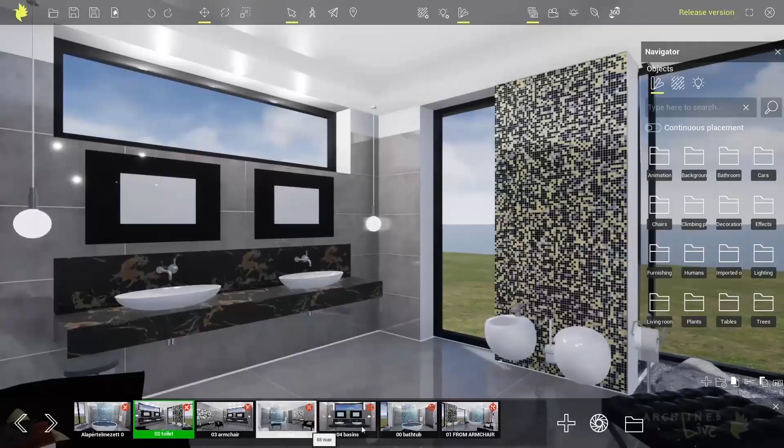It took a few minutes to visualize this, but after that you see nice glossy reflections in real time, and everything you see from now on happens just as you would design it, at the same pace. It is not sped up. What you do now is all in real time. Even the images you find here are all created instantly in one second, because now the software doesn't have to render it, it just needs to save the image we already see.

So it really takes only a few seconds to create all these visuals. This is just an initial, conceptual version of it. I will enhance it with further details, but if the client demands it, I can already send them nice visuals that we can talk about.

Talking about the material reflection types, as we decided to have ceiling type and wall type, those materials are all either glossy or matte, but I can change their brightness and reflectivity in real time. However I change these values, I can see the changes instantaneously in front of myself on the screen.

Should I want another image, I can just save it as an image file again. Later on, I'll show you how to create a visual video in the same quality as you see on the screen. So this is what you can do with these materials - you can change them, and you can even use the built-in material libraries of the software. I'll talk about that. The software ships with beautiful metals, water surfaces, and so on.

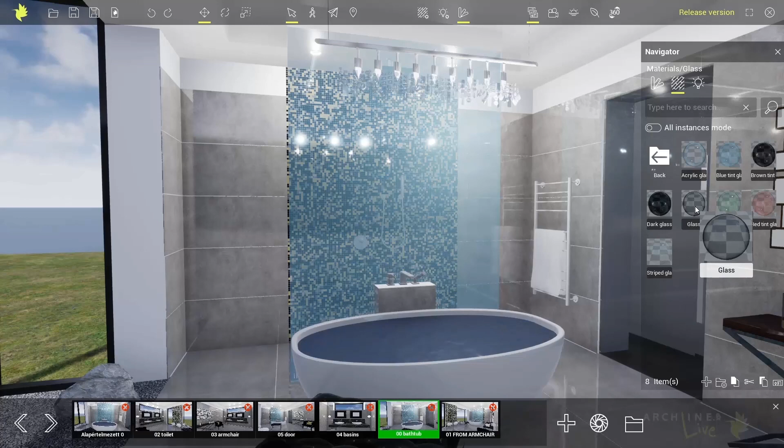Now, for example, I can either decide to keep what I already have on the visual in front of me, or I can click and drag another material and test whether I like it better or not. I think perhaps this one is a bit better, and if I want, I can just tweak it.

There's one key point here - you can change materials one by one, or you can say that wherever I use this material anywhere else in this project, I'd like to change them all. For that reason, there is this all-instances mode option. If I click and drag another type of material to change that surface, which is a nice glazed glass door, it will change the door and also change the panel behind the bathtub. So it's like an all-instances mode, changing all instances of this material everywhere in the project.

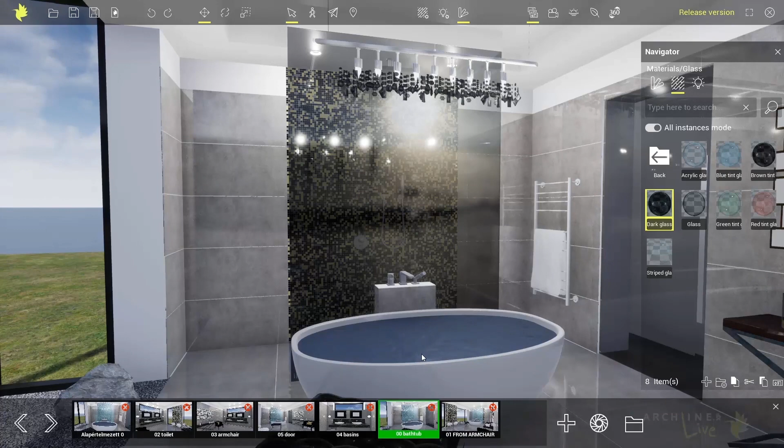And the same goes for the water surface - the software ships with a nice animated, detailed water surface. Let's just close up a little bit more.

Then what you can do is go back one folder and look for the water folder on the right hand side, and you can choose any of those, like clean water, pool water, deep water, and so on. You can click and drag to test whether you like this one or the other, and decide which to keep, then take a shot of this interior.

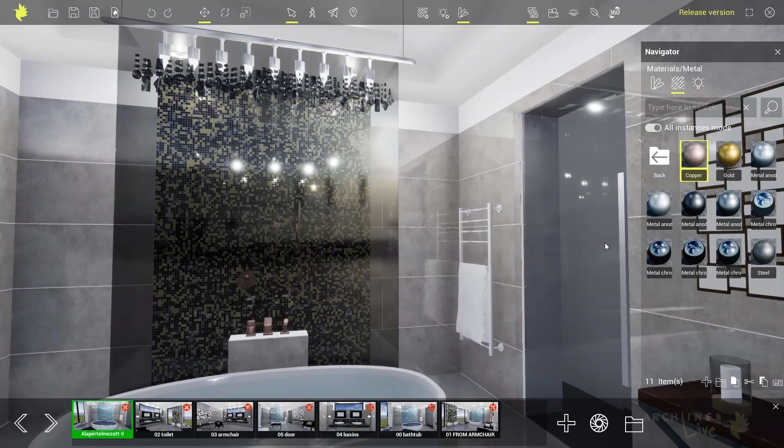Let me quickly add a few metals, and then we can focus on the lamps and light sources as well. So now let's change these. As you can see, I've changed everything to copper, and I think I should use some nicer darker metal here. Perhaps that would work much better. I think I'll keep that.

I just love that the feedback is instantaneous, you don't have to wait for the rendering to be done. That's right. For this one, you actually need a little bit more powerful graphics card than you would for generic CAD software, but you don't need a very powerful rig. You should at least have a medium quality graphics card. You can find the system requirements on our webpage, and if you need help, we're happy to help you understand whether your computer matches the requirements.

As you can see, during daytime the sun is actually part of the living environment. You can play how the sun moves around, and you can also record this into a video file. But as you can see, we have this surrounding that is kind of empty in the background, so sooner or later we will have to add a few more trees or something, because all we have is a little bit of the surrounding. But let's just focus on the lamps first.

Now we've created a night scenery. We changed the date and time to somewhere during early night. Then I select the lamps and change their intensity. I can change their color, adding a little bit more warmer tone to this part of the interior if I'd like. For example, this material is a little bit cold, so I'll just pick a warmer color, and it already behaves the way I want it. If I'd like, I can change it a little bit more.

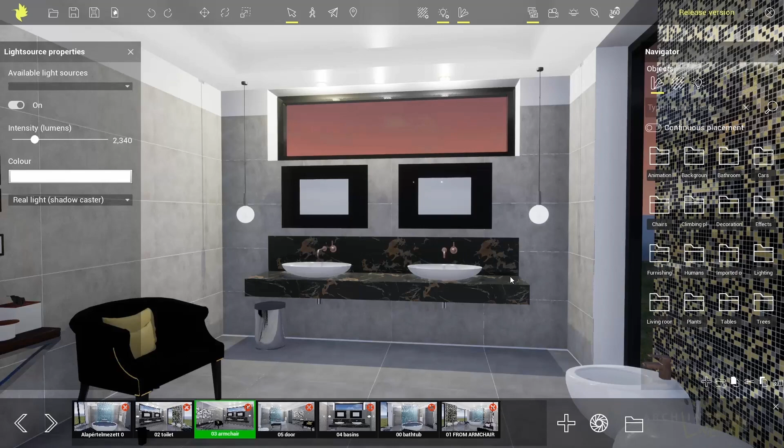At the end, what I wanted to add is a little bit of the surrounding. We're not designing the surrounding, we're focusing on the interior, but now we'd like to add a few things, like at least a few trees or something like that. I can use the built-in library of the software. We have nice, beautiful, detailed plants and trees, nicely represented in tiny thumbnails, and you can also see tiny human figures next to them, so you can easily understand how large that tree will be.

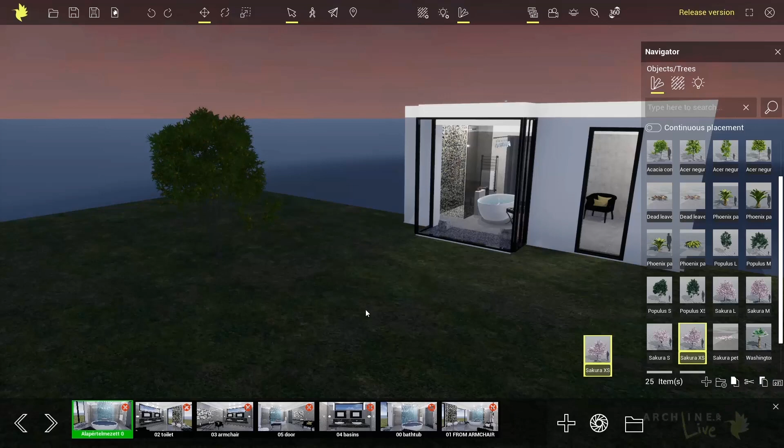Then you can just select any of those. Actually all those trees are moving, as you can see - perhaps on the left hand side, the sakura is nicely blown by the wind. You can pick one and change it, and if you change your mind, you can undo that or erase it. You can shrink them, change their sizes, rotate them, and it all happens instantaneously, in real time. You can also find those items with a proper name, sized L, M, and S, and sometimes extra small, named properly based on their sizes.

There's a few trees already outside, and if I work a little bit more, let's jump to the following version of this design, where I have a little bit more detailed surrounding, and it will look a little bit more dense with the surrounding.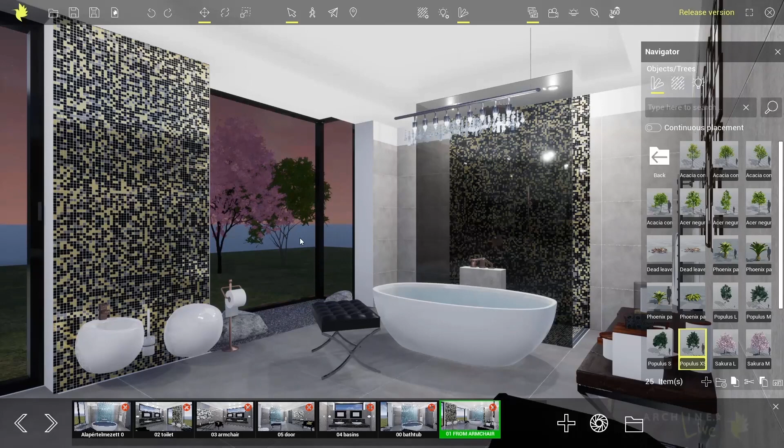This is how you can add all the trees, perhaps a few bushes, and something else. The same way you can add decorative items, like smaller decorative flowers, pots, or other details. You can just pick those, and as you can see, those are very detailed, with realistic reflections, really spicing up the visuals.

They also have a library for bathroom items, chairs, beds, tables, and so on. There are humans, a few cars that you can just pick and use, and place them right away the way you want. Let me just quickly add a few of these items, like this here, and another one over there.

There's actually another tool which we won't talk about today, which is populating larger areas - you can paint areas with grass and so on. But because this area is very small, I just place single plants one by one.

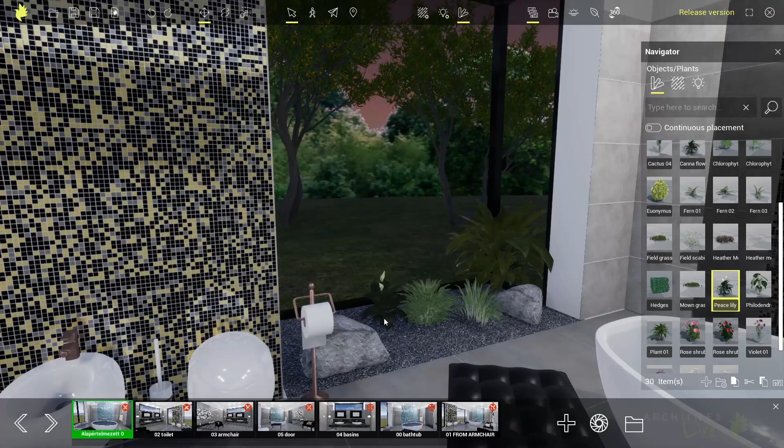If I would like to, I can just select them. I can move them around using these axes, and also rotate or rescale them using all three transformation tools. I'm just moving this item on the floor. As you can see, the two main axes are highlighted, so this is how smoothly you can move even a chair or something else like that.

At the top you can find the rotate-rescale tool as well. If you switch to that one, you can click and drag to nicely rotate that item and perhaps enlarge it in any of these axes, or you can click and drag in the center to make a nice uniform scaling for the object.

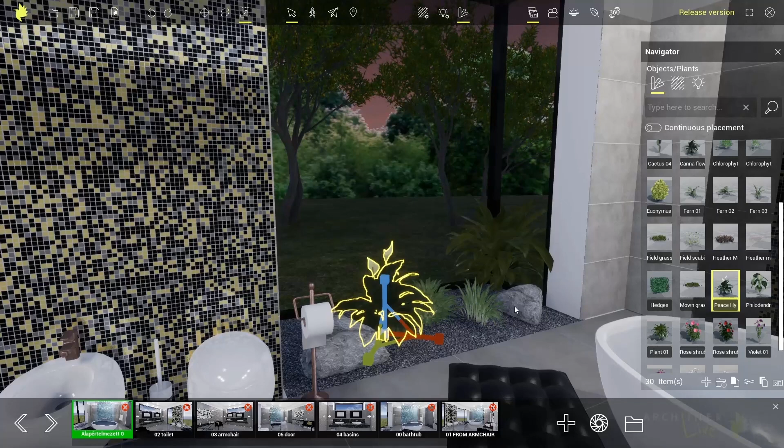So actually this is how I populate this area. There's another thing I'll talk about in a second - you can increase the number of items in the libraries of this navigator.

You can import items as OBJ files, or you can directly pass single objects from ARCHLINE to the live software. You just click on them and use this option to send these objects to live, and then these items automatically appear in the imported objects library.

Now I have this nice towel, which I can just place over there. I can do the same thing - change its material, resize it, rescale it. Then I can do the same thing with this bathrobe.

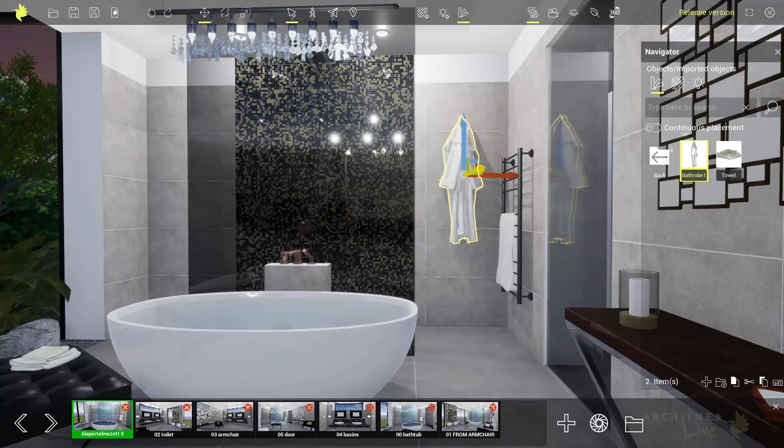Well, this is unfortunately facing the wrong way, so you can rotate it. Yes, of course, it's not a problem - you just refine the position like this. That's much better. And if I would like to, I can change its size as well.

Talking about effects, this is a very good thing you can do with your visuals - you can add fire, steam, and other effects if you would like to. Just pick and drag, and there it goes. It's already living - as you can see, it's nicely moving a little bit.

You can do the same thing with all the rest. When you have these all lit up, this little tiny extra detail will give it a real nice kick towards realism. Then you can just update those images.

Initially I created a few images, and now you can see how quickly I can refresh those - I just click on this button. Now I do that, and it is refreshed. This is how instantaneously, how fast you can refresh all of those images.

I just did that, and when you go and open up the folder, the previous images are already updated with the latest version, with all the candle lights, all the tiny details, decorative items. The bathrobe is there, and also a few other items I added later, and of course the background - a nice chair over there and a little table where I can put things on.

In the end, I also mentioned I would talk a little bit about how to record this animation. As you can see, the animation that I've created in ARCHLINE is passed here, so I can just play it, and with the push of a button I can save it into a video file.

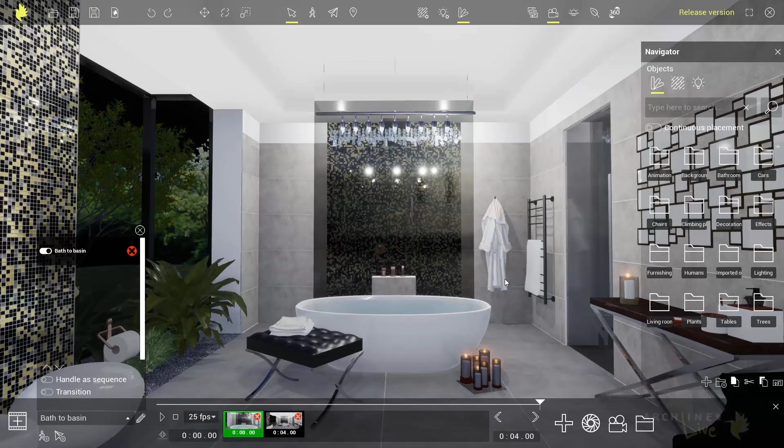But what happens if I not only want to save this file, but I just realized that I should create a few more shots to represent this interior a little bit better, and I would like to save those into one entire animation video file. So I just pick up a new spot from where I would like to start a new animation, and I add the new animation with its first keyframe.

This is what you can see at the bottom of the screen, this is what we call a keyframe. This is where the animation starts from, and then you just find the end spot where you would like to have your animation ending up, and you click on that option. Now this is a 1 second animation, so I need to change its length.

It would be too fast, but I can easily do that. I just click here and say this should be like 5 seconds or 8 or something like that. I retype this value, hit enter, and now I have a 4 second animation. I just click and scrub this timeline, and if I like that, I can play it, preview it, and save it as a single video file in the end.

But if I don't want to use video editor software, there is one extra step the software can do for me: it can actually handle these two animations, or any further I create, as a sequence, stitched after each other. And then I can also set up a transition with the proper transition option.

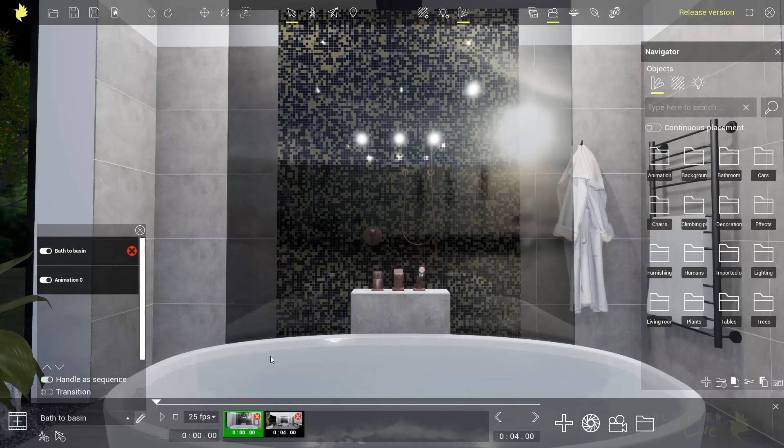When I place this, I already have the bath to basin and the animation 0, which I can of course rename if I want. Then I enable the transition, and now if I play it, I have a black to content transition, fade out to black and back to the content and fade out. So this is already automatically created.

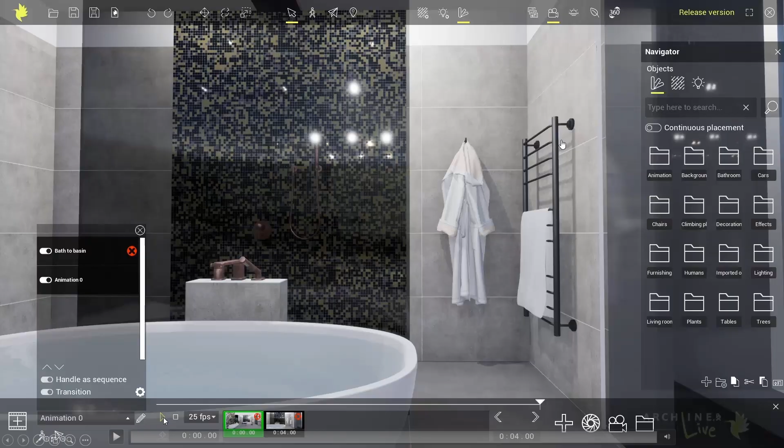And if I click on the little camera icon, I can save it into a video file. So this is how it happens with the software. In a nutshell, this is what I wanted to show in the context of interior design in this specific bathroom case. That is what I wanted to show you about what ARCHLINE.XP offers in terms of interior design.

But I understand we have a few questions. Even though we are running a little bit late, I think we should talk about these questions as well. So here's one for you, Illesh: how can you change the texture of the wallpaper?

You mean, for example, the one I've created previously? If you could just repeat that, that would be lovely. Yes, it is a very simple task to do. You can just pick up any of those materials. I actually have that material already created, so I will just pick it up and say I would like to use this, name it Novedge.

Don't forget, while Illesh is doing it, that you can download images as well from the internet, and then use these images. Yeah, well, actually this is how we got this image. We found it online and downloaded it on our computer, and then I edited it as an image file inside the software.

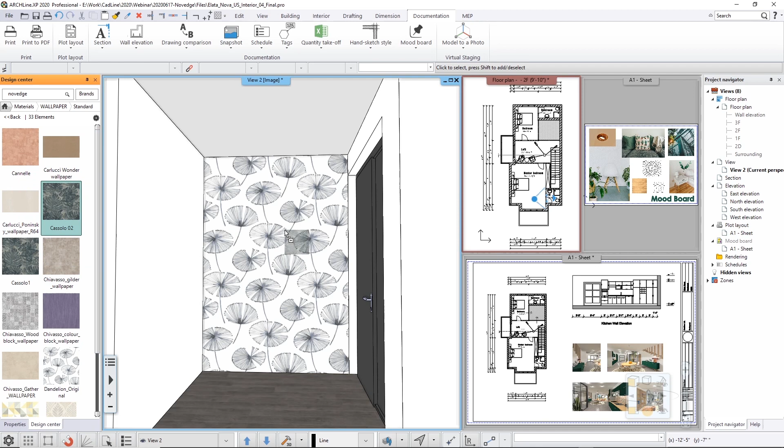So now, if I would like to change this to anything else, perhaps this is what the question is about. I need to find any of my other materials that I would like to use, and if I use this one, for example, I think this will be a nice seamless pattern. If not, we will see. I just click and drag and release, and say I would like to change this material to another one on this object. So this is what I do, and this is how it goes.

So with the click and drag, the same goes with the floor and all the rest of the materials. Let me try to find a nice cherry wood or something like that - it's a nice African cherry. If I place it here, I can say replace this material everywhere on this project, and the software will do it. I just click here, and now all the same materials are changed. This is how easily you can change materials from one version to another.

I hope that answers the question. Here's the other question we have: for lighting, does ARCHLINE have an intelligent calculated lighting layout based on the floor area?

I think this should be the built-in power, wouldn't it? The software will be able to calculate an estimation, just as we showed you before, using this interior lighting plan and the built-in power calculation, but nothing other than that. So there will be no other graphical distribution layout or something like that. It will be kept as a calculated value that you can place on the drawing.

Ready for the third one? Yes, please. On the schedules, is there a possibility to place a cost to each component, for example, a door, for a priced bill of quantities?

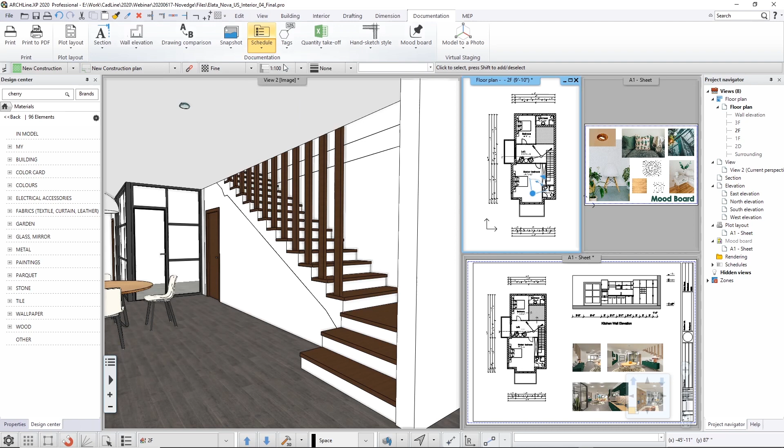Well, you can actually build any of those calculations yourself—schedules, and even tags. We didn't mention those, so you can not just place ready-made tag schedules, but you can also define your own schedule. An interesting thing here is you can go with any of those types and select any of the values you already have. As this is a BIM software, you already have options like price and so on, but you can also add additional items.

For example, if I go here and reveal what sort of BIM parameters this wall has, I can see simple base values, quantities, common values, and I can add any parameter I'd like. The software, based on your schedule setting, will list it into the schedule, or you can create Excel lists as well—listing details like thickness, volume, surface, and so on.

In the case of tiling, for example, the software even calculates the amount of tiles piece by piece. It gets listed into an Excel file, and then in Excel you can do whatever you'd like with that data—you can also calculate cost estimations and so on.

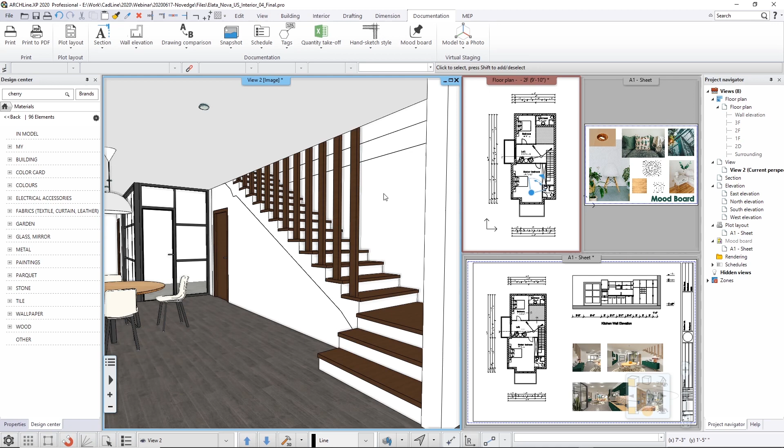So I hope this answers the question. I think it does—thank you very much for the questions that were asked. I'm just checking these were all that we had. We were running a bit late, so sorry about dragging this on, but we had questions we had to answer. I hope you had a comprehensive understanding of what ARCHLINE has to offer. And now back to Barbara.

Yes, hi guys, that was great. Actually, we have another couple of questions—I'll just ask one: what kind of training is available?

Lucky that you asked that. Let me bring it up—if you could open up the website and go to the webinar section. Especially now, with the social isolation, we've spent a lot of time at home and created a lot of training content. If you could go to the workshops, the second tab, please.

We have four different workshops for ARCHLINE: three for interior design—preliminary, intermediate, and advanced—and one course on architectural modeling. If you pick, for example, preliminary interior design, you can see we have many videos on different topics, such as kitchen design, tiling layouts, calculations, etc.

There's downloadable content here too, so if you want to follow along with these free courses and study in your own terms and time, you can download the content, the written course guide, and the workshop projects. All of this is free—the software can be learned from beginning to end without any guidance, in your own time and pace. If quarantine was good for one thing, it was good for investing in learning.

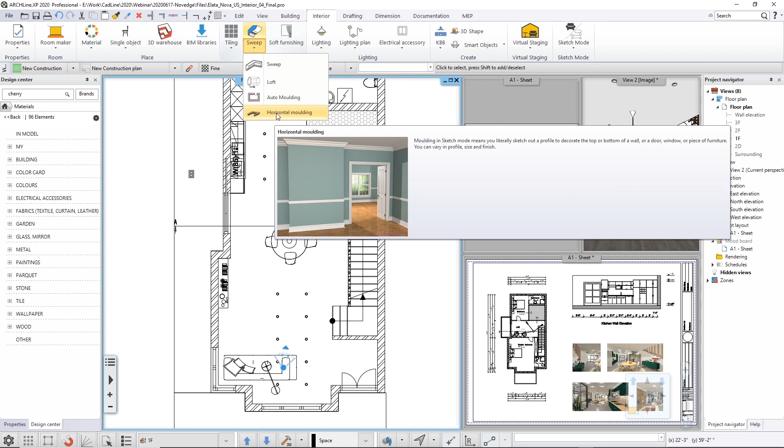Or you can use this horizontal molding tool where you pick up a profile, and you can quickly draw a molding around here like this. Then you can go to the library - I mean go to the settings, and instead of this very simple profile, you can find a different cross-section profile like this one.

Let's just go to the libraries here, and let me pick up another one. I think I'll pick up something - we have a few named PX, and there's another one with plinth, I believe. I don't remember exactly. Let me just use the PX one, and then pick up, for example, this one.

Now these are ready to use, but the same way these were created, these are line drawings - you just draw anything here as a cross section. Then the software, let me just close this, has a tool to turn this cross-section into a profile.

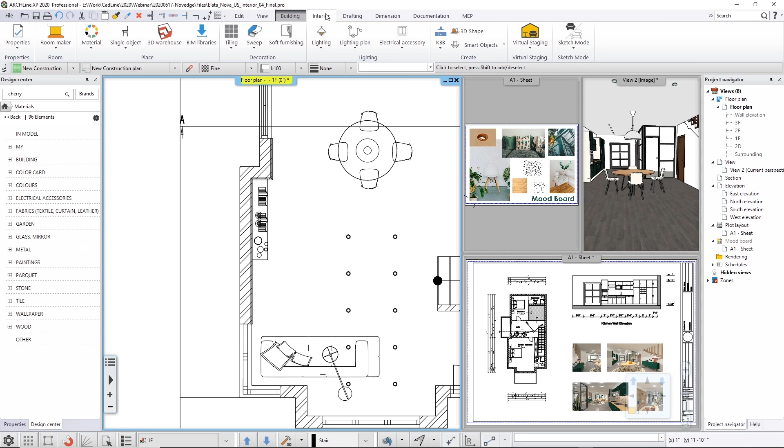I believe it's here, let me search where the profile tool is. By the way, this is a very good thing - you can search for anything. For example, there's this define custom plane, add profile, modify path, section profile, sweep tool, all sorts of things.

What I'd like to do is the close profile tool - there's this new profile, define close profile. So any line drawing that you create or import, you can turn into a new cross section, and then use it on your design as either molding or as a decorative profile around the ceiling, for example. Hope that answers the question.

So yes, I'm having all these questions - it means we really struck a note with this topic. Barbara, I hope you don't mind us dragging on for too long. No problem at all, everybody's so engaged, I don't mind it at all.